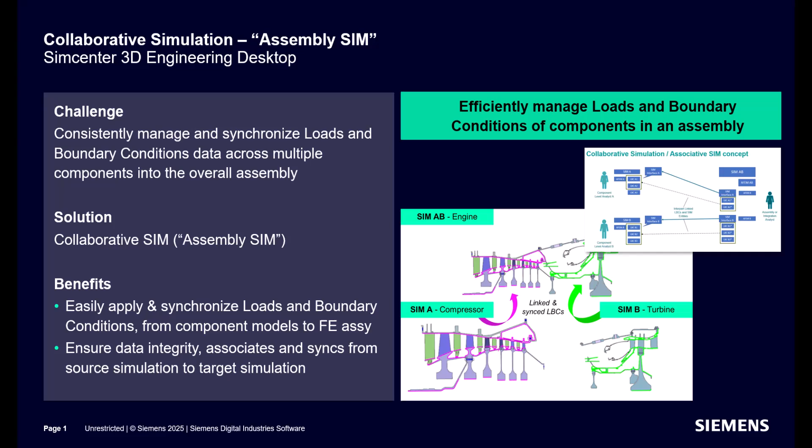Let's take a look. We start with an assembly FEM of an aero engine consisting of 3 components and a simulation that has no loads or boundary conditions. There's a component for bolts, another for the high pressure turbine section, and a third for the compressor. Now let's switch to the high pressure compressor's simulation.

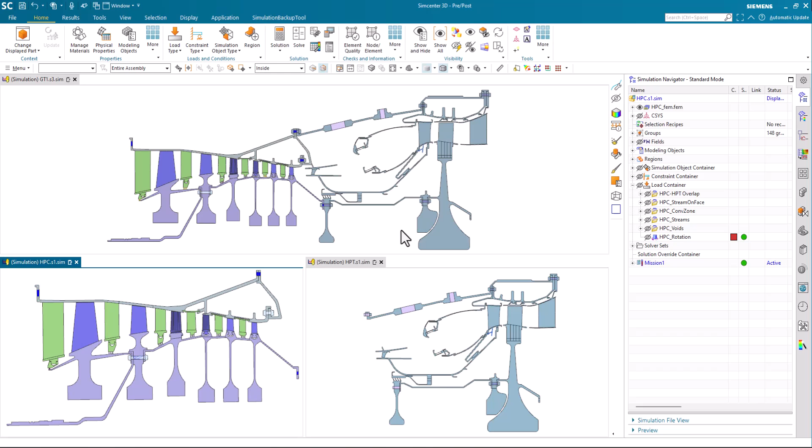I'll turn on the display of the loads in the compressor. The loads are organized by folders. I have a folder for streams on faces, another for convecting zones, streams on edges, voids, and then I have a rotation load. So there's a lot of load data in this model. And it would be nice to share this information in the assembly. So let's do that next.

I'll open the Simulation Interface Manager from the Simulation Navigator, and you'll see I have 2 tabs, one for exported simulation interfaces and another for imported simulation interfaces. In the component, we're going to create an exported simulation interface. So we do that now.

It's going to present a dialog in which we have an entity list where we will select objects to share with the assembly simulation. So I'm going to call this HPC Mission 1, and we're filtering by our solution of interest, looking at all entities, and then select the rotation load, these void folders, stream, convecting zone, stream on face, and then some of the constraints and simulation objects as well.

And then I OK out of the dialog, and this will give me another container. So I have a simulation interface container, and I have my exported interface object there. Now I will go into the assembly's sim and import interface objects from the compressor and the turbine.

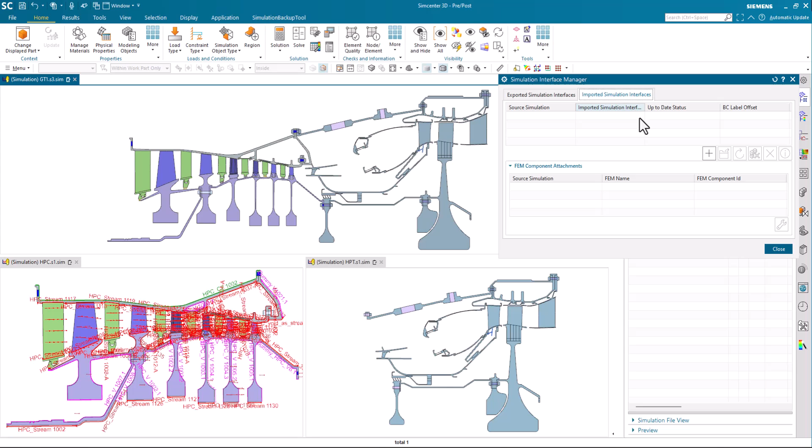Importing objects is much like exporting, just in reverse, and I can pick the component simulation and the interface object of interest. I'll go ahead and say OK to the dialog, and you can see it's highlighting the component, and now we have the loads in our assembly sim and the simulation objects and constraints as well.

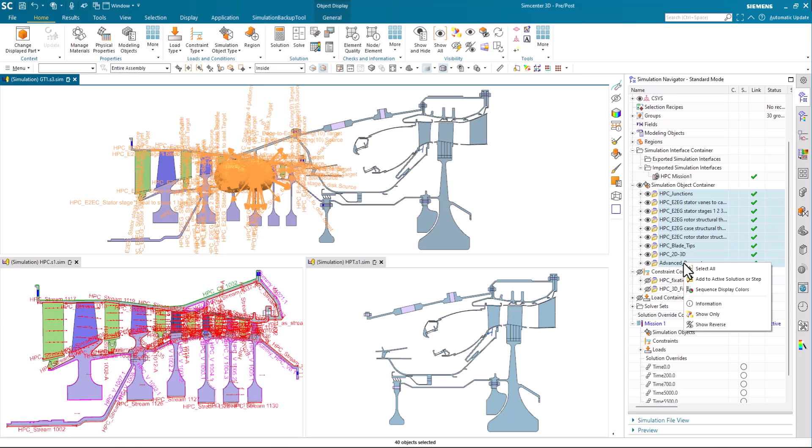We have this new column indicating a link status. So these are all green. They are up to date, and I have a new imported simulation interface object. So in order to add those to the current solution, I'm just going to select them and say Add to Active Solution. Do that for the constraints and the loads as well. The turbine's interface object was added to the assembly model also.

Now let's look at updating content from the component simulation and applying those changes to the assembly's simulation. So we switch into the compressor simulation, and we're going to modify the stream 1130 on that last disk. We're going to change the swirl input type from being defined with a ratio to that of a velocity, and you see our expression based on radius and NH, a condition parameter. So I say OK to that, and then go back up into the assembly's simulation.

And first thing we notice is the interface object from the compressor has gone out of date. We have an update to our status. It's telling us that we need to update, and we can go down into the particular folder that contains that stream, and we see that that stream is in need of an update. And then we can also edit that stream just to give an idea of what edit is like in terms of an imported interface object.

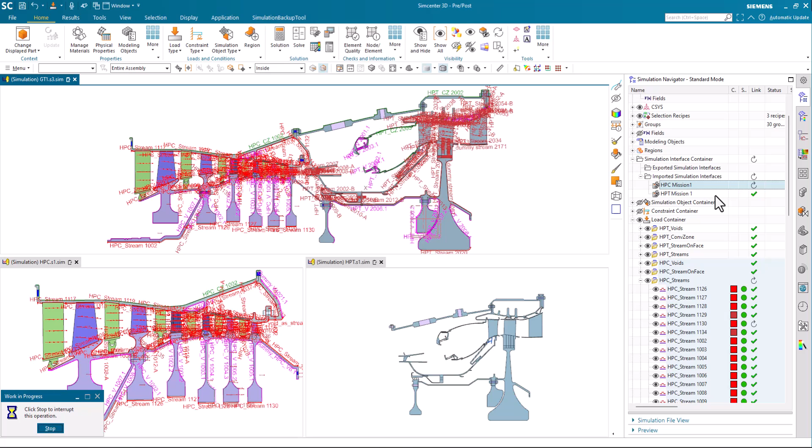In fact, you can't edit any of these objects. These are just read-only type of objects when they're being imported. So I can't make any changes to selections, I can't make changes to expressions or any of the parameters of this load. So what I'm going to do now is go ahead and update this, and then we'll see after I update that load has the definition of its swirl input as a swirl velocity with the correct expression from the component simulation.